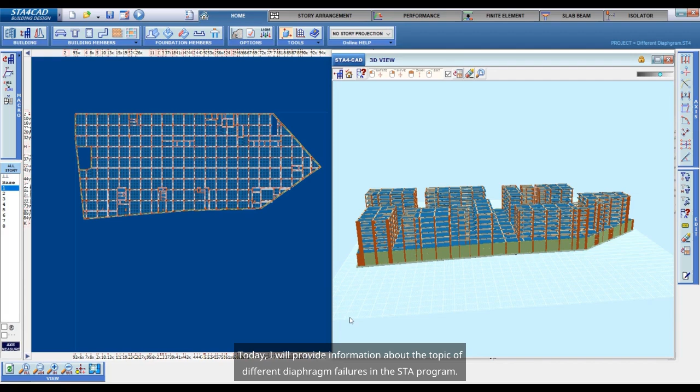Hello everyone. Today I will provide information about the topic of different diaphragm failures in the STA program: how different diaphragms are assigned in the STA program, and in which situations we need to apply different diaphragms.

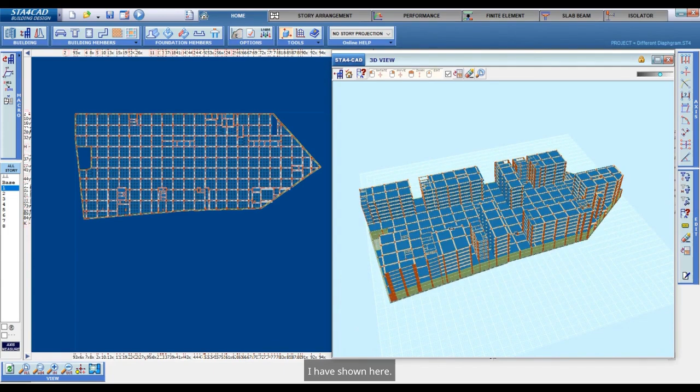The assignment of different diaphragms is definitely a method that must be applied in structures like the one shown here. If we examine how this example differs from normal structures, it is evident that we have a structure where the foundation and basement are rigid.

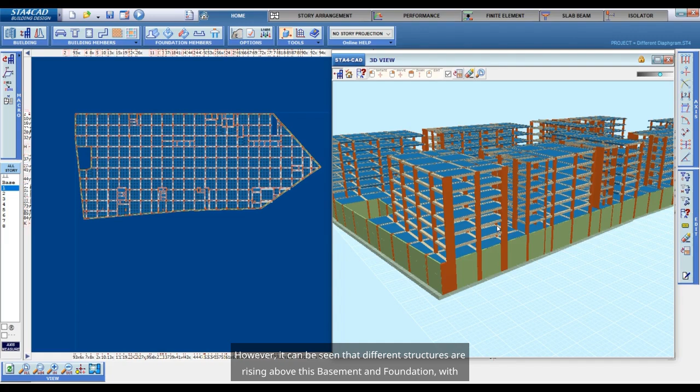The foundation and basement behave like a single structure. However, different structures are rising above this basement with separate blocks being constructed. If we solve these structures within the same data, we must perform different diaphragm assignments for these blocks that rise separately, because if we solve them under a single seismic effect, we will be considering only the highest period.

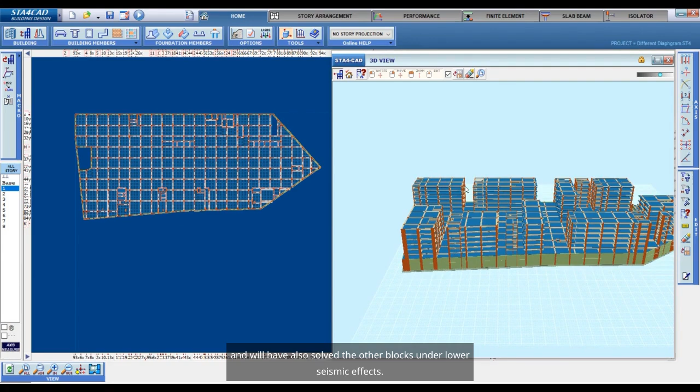We will also have solved the other blocks under lower seismic effects. This will not be a correct approach either, because the rigidity of each block is different from one another. Their heights may also vary for this reason, and they will behave more rigidly. Blocks at a lower height will actually bear more seismic load.

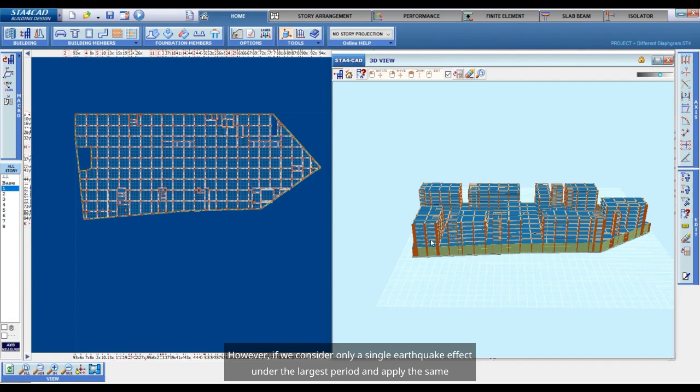However, if we consider only a single earthquake effect under the largest period and apply the same earthquake to the entire structure directly, we will have designed the structure under low seismic loads, and the peak seismic effects we calculated for the whipping effect will also be incorrect. Therefore, when we apply different diaphragm effects, each block will be calculated under its own seismic effects, and we will achieve a much more accurate result.

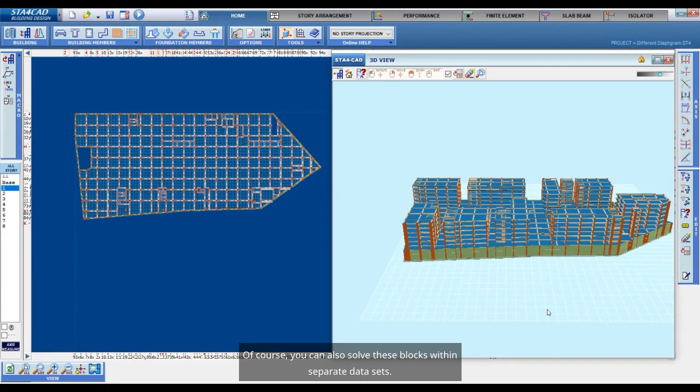Of course, you can also solve these blocks within separate data sets. In that case, there is no need for different diaphragm assignments. When you solve these blocks in separate datasets, each will receive the seismic effects according to its own rigidity, and will provide you with the correct result again.

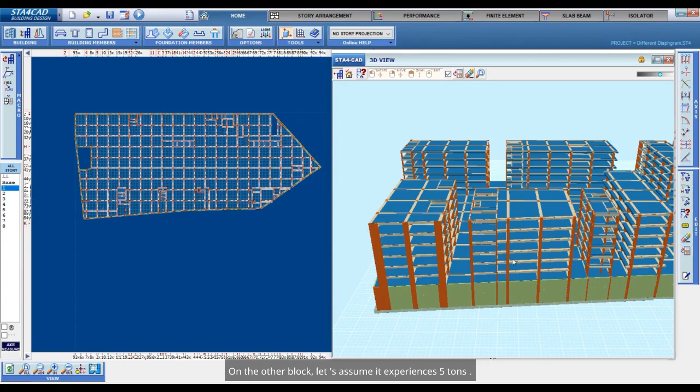For example, let's say this block experiences a seismic effect of 10 tons at the top, and the other block experiences 5 tons. When you solve them separately, you will see the values of 10 tons and 5 tons. However, when you solve them together, you will see the total, which is 15 tons. In other words, there will be no issue, as long as you assign different diaphragms between the calculations.

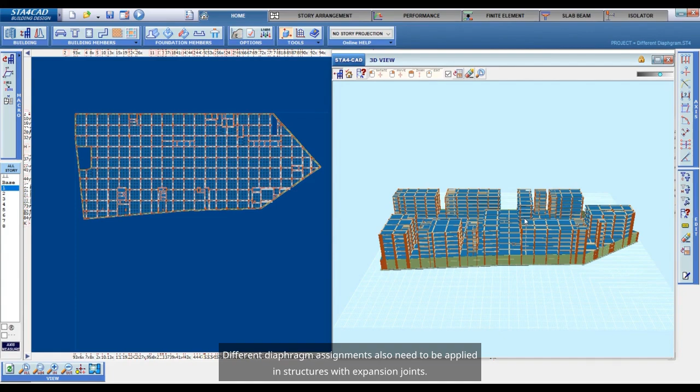Different diaphragm assignments are not only used in these types of structures. They also need to be applied in structures with expansion joints, because in those cases you are separating the related structures with expansion. Now they exhibit different behaviors from each other, so they should also undergo different diaphragm assignments in the same manner.

Here, we mentioned that accurately calculating seismic loads is very important. So why are seismic loads calculated incorrectly when we do not implement different diaphragm assignments? I will also mention this.

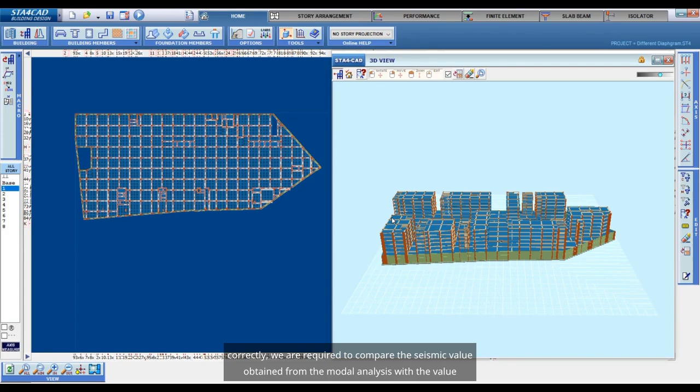In fact, when you perform a modal analysis solution, the seismic loads are calculated correctly even if you do not apply different diaphragm assignments. However, even if the modal analysis is calculated correctly, we are required to compare the seismic value obtained from the modal analysis with the value obtained from the equivalent method multiplied by the beta irregularity factor. We need to consider the larger of the two as the total seismic effect.

If beta is for an irregular structure, 0.9 is used. If it is a regular structure, 0.8 is used. The value is entered from here.

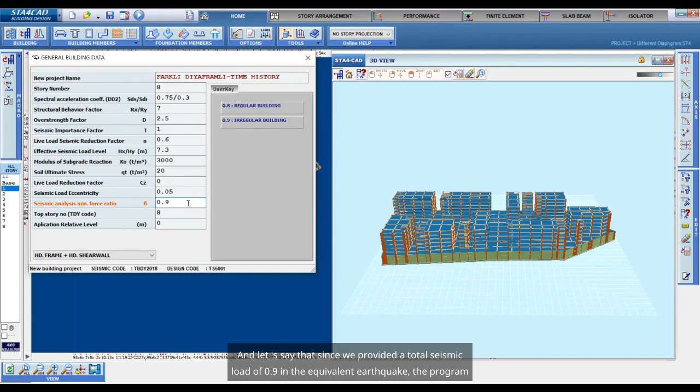Let's say that since we provided a total seismic load factor of 0.9 in the equivalent earthquake, the program will also multiply by 0.9 and compare it with the value obtained from modal analysis. It will take the larger of the two. If the modal analysis value is larger, there will be no problem.

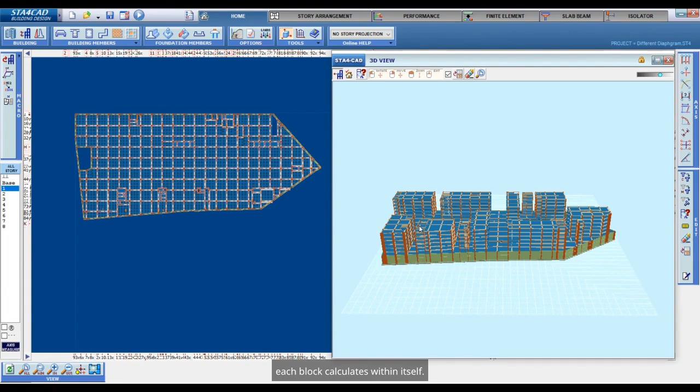However, there is a possibility that the equivalent earthquake value may be significant. In terms of accurately calculating the equivalent earthquake load, we need to perform different diaphragm assignments and ensure that each block calculates within itself. Otherwise, it will go with the highest period condition and solve the entire structure, resulting in an incorrect seismic calculation. The value we obtain from the equivalent method will be incorrect.

If the equivalent value is large, we will have designed our structure with an incorrect seismic force. This is important from this perspective in multi-block structures.

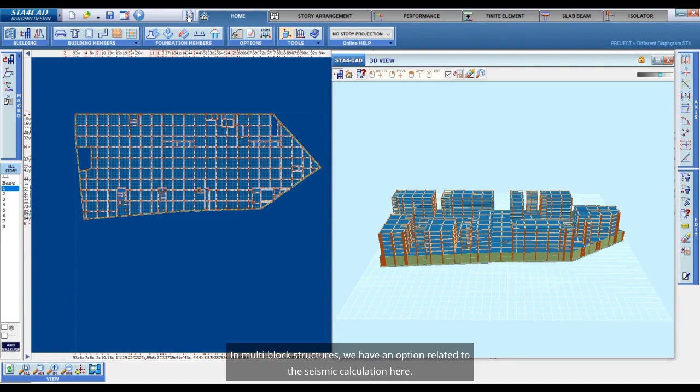We have an option related to the seismic calculation. Here, we need to mark this. Yes, look here, we are coming to the seismic code option, that is, the earthquake options.

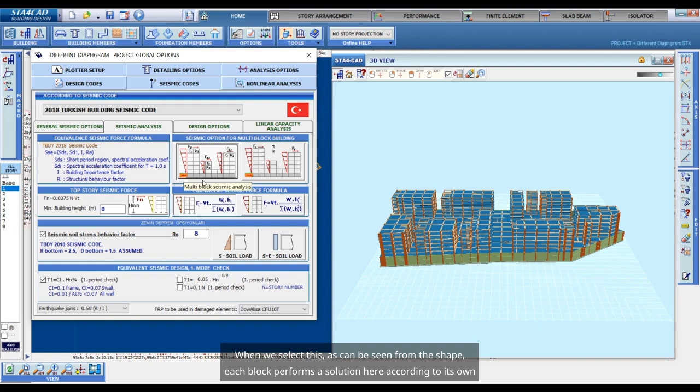Here we have the option for seismic analysis. When we get to this point, yes, we need to select this option. For multi-block structures, it is important for this to be selected. When we select this, as can be seen from the shape, each block performs a solution according to its own period, its own rigidity, and under its own seismic loads.

Here, you can see the option that should be selected for single block structures. It performs the solution based on the structure with the largest relevant period. It is designed as a single block structure, and the seismic load affects it accordingly, distributing the seismic loads to all blocks based on this. As can be seen, each block does not distribute seismic loads within itself if it is a single block structure like this, or if separate blocks connect at the upper floors.

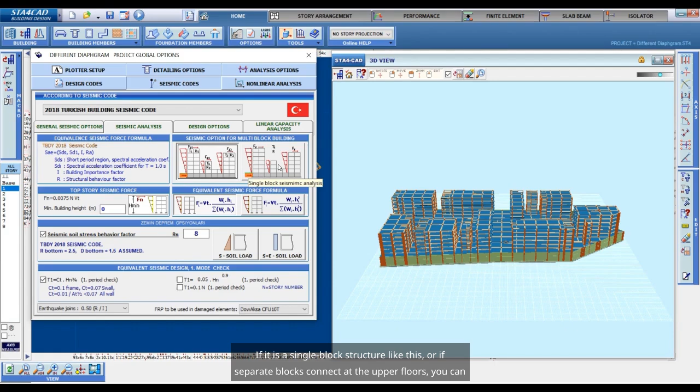You can choose this method. However, the option you need to apply here must be this one. We are selecting this option. After selecting this option, we come here. Now, how will the different diaphragm assignment be done? I will show this here.

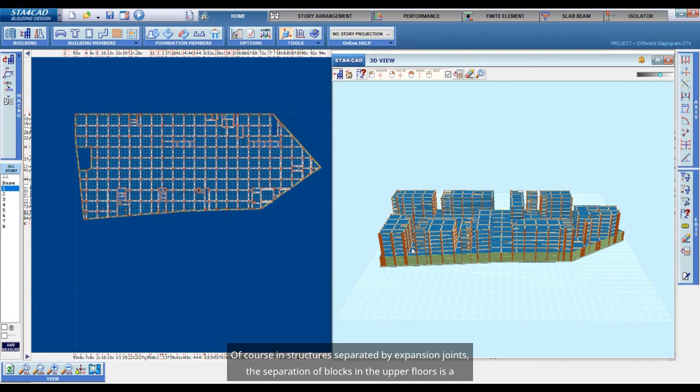Of course, in structures separated by expansion joints, the separation of blocks in the upper floors is a reasonably expected behavior. However, in very rigid structures like basements and foundations, the separation due to expansion joints can cause significant damage to the building. And this practice is not recommended by regulations. For this reason, please be careful not to make any separation with expansion joints in your basement structures.

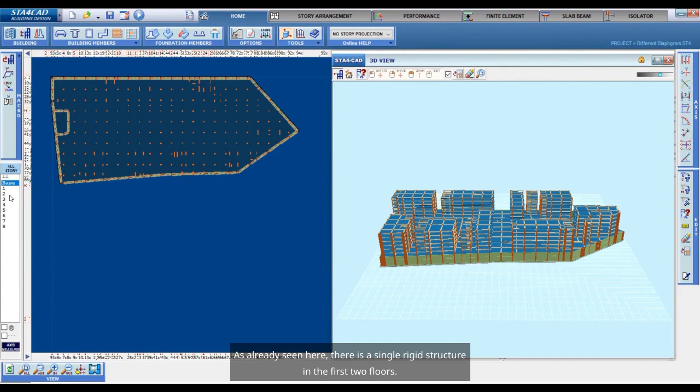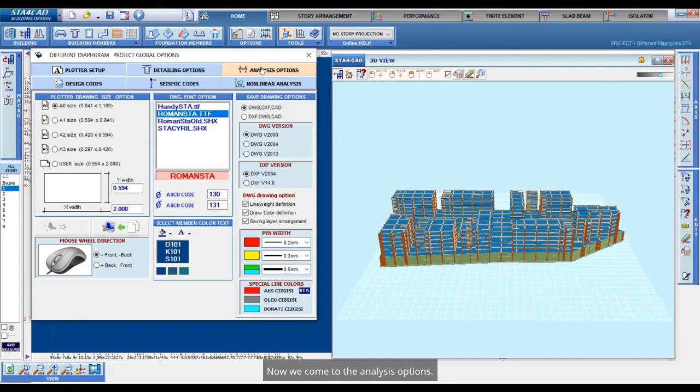Foundation. As already seen here, there is a single rigid structure in the first two floors. Starting from the third floor, different blocks begin to emerge and continue up to the 8th floor. Now we return to the options section for different diaphragm assignments. And here, in the options section, now we come to the analysis options. Initially, we are on page 1 of the static analysis options. The different diaphragm assignment option is here, and we need to select this option.

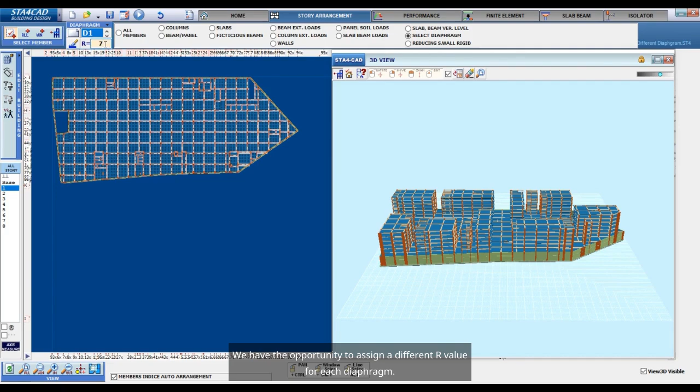After selecting this option, we come to the story arrangement button. Here, immediately, the diaphragm select button appears in front of us. When we click the diaphragm selection button, the first diaphragm appears. We have the opportunity to assign a different R value for each diaphragm. Because we will assign different diaphragms to the blocks, the structure of each block, the behavior of the structure, may be different. Therefore, we can enter this R value separately for each block.

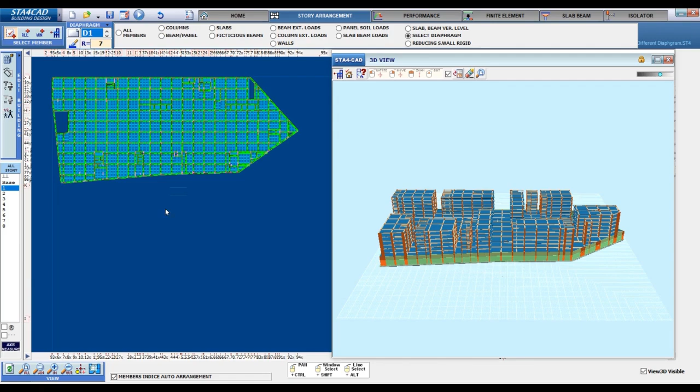Since the first two floors are completely rigid, we can also perform a single diaphragm assignment. There is no issue here. To perform the diaphragm assignment, I select the column with the mouse and include it within the frame. Yes, it has now completely assigned the diaphragm to the first floor. Then I come to the second floor.

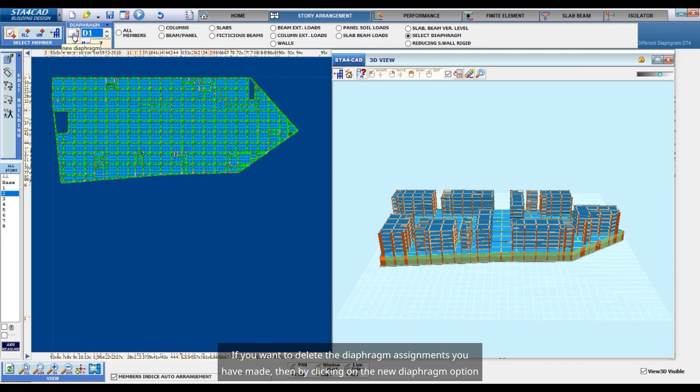Look, there is also an automatic diaphragm assignment option here. I am selecting the automatic diaphragm assignment option. When I click on a floor, that's enough. It will automatically detect it. Look, it has completely assigned the diaphragm for the relevant floor by itself. If you want to delete the diaphragm assignments you have made, then by clicking on the new diaphragm option, all your diaphragm assignments will be deleted and you will have the chance to reassign the diaphragms.

Here we have reached the third floor. From this point on, we need to make a different diaphragm assignment. Of course, we can assign our first block with diaphragm 1 again. The rigid blocks can have the same diaphragm number as mentioned earlier. This is not important. We assigned it this way. However, we need to assign this as D2 now. I'm coming here and selecting this as D2. Afterwards, I select it as D3.

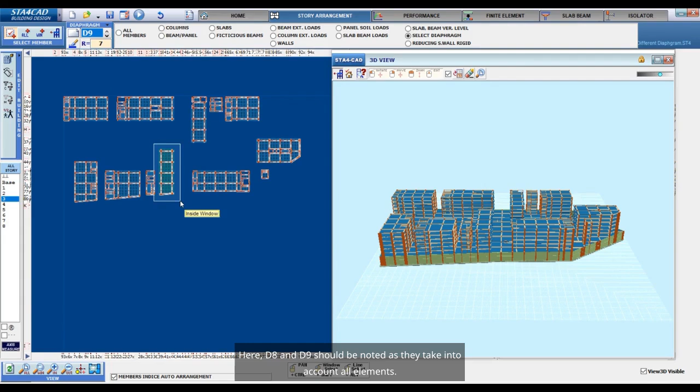Then I assign all the blocks separately in this way. D4, D5, D6. As can be seen, I can enter a separate R value for each of them. There is no issue here. I can enter the appropriate R value for all of them here. D8 and D9 should be noted as they take into account all elements. It is beneficial for us to check.

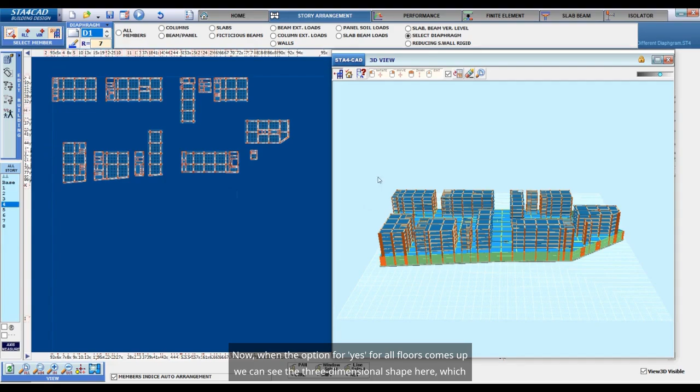Yes, as you can see, I have currently performed diaphragm assignment for 12 of them. However, we have only done this for the third floor, of course. We can apply it to all floors for faster processing. Now, when the option yes for all floors comes up, we can see the three-dimensional shape here, which shows the areas assigned. Now, when I select this area again, you can see that the first one has been completely assigned as 1.

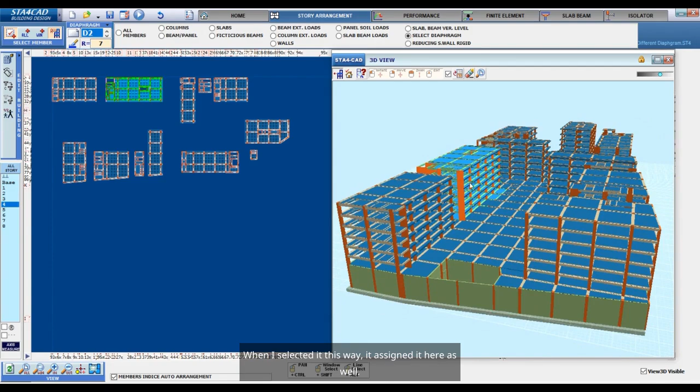Then, I move on to the second section, where the option for all floors is also selected. When I selected it this way, it assigned it here as well. Of course, when we do it this way, it assigns quickly, but different diaphragms started to form again on the first 2 floors. After that, you can assign them to a single diaphragm again, from scratch. This situation occurred because there are completely rigid structures below.

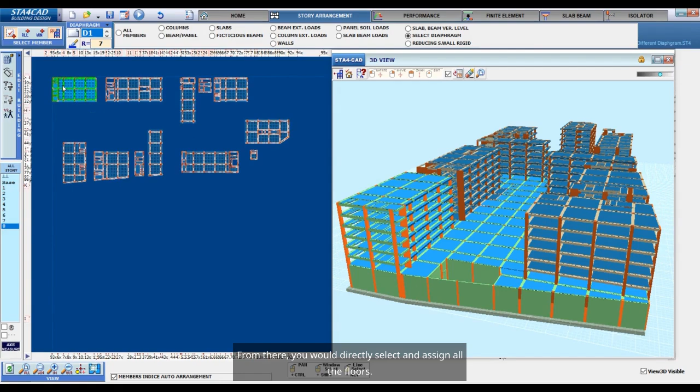In fact, the most logical approach here was to start assigning from the 8th floor. From there, you would directly select and assign all the floors. However, separate diaphragms would still be assigned for the first 2 floors. Then you come back and reassign the diaphragms on the first 2 floors as a single diaphragm again. Of course, you will need to turn off option 10 here.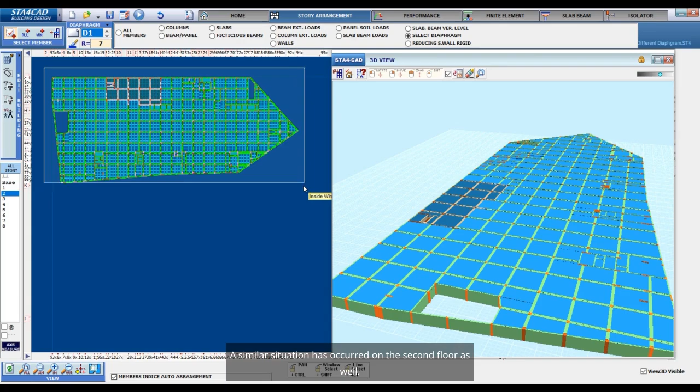It was again taken completely as D1 here. Yes, look. On the 3rd floor and the 4th floor, it has already taken D1 on all floors. When we look at D2, we can see that it has also been taken on all floors. Here. For example, let's look at the 2nd floor. A similar situation has occurred on the 2nd floor as well. Now I'm taking it as D1, like this, yes.

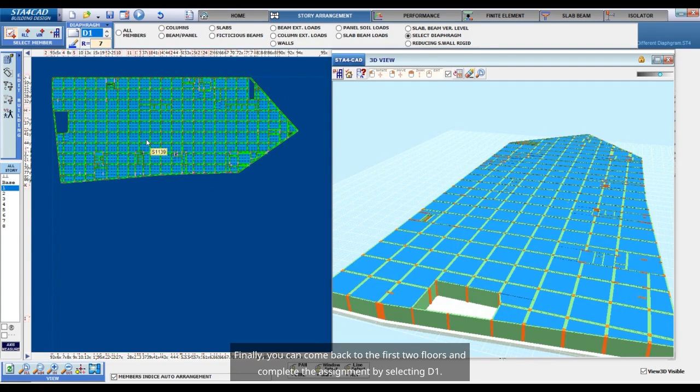However, when we look at the 3rd floor, there is no issue with D1 and D2. Similarly, you will assign all of them, collectively using the option for D3 and D4. Finally, you can come back to the first 2 floors and complete the assignment by selecting D1. Now, I will quickly finish these steps and continue with the video. Yes, our allocation is now complete.

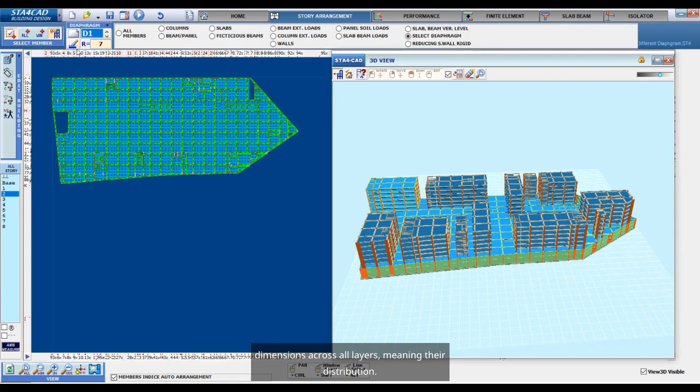After making the allocation, you select the option here again to view the relevant diaphragms in 3 dimensions across all layers, meaning their distribution. For example, the D1 diaphragm. Yes, in this way, we can see that it has taken the entire rigid structure and the first block here. Then we come to D2. Yes, we can see that this is just the 2nd block without touching the rigid part at all.

Then the 3rd block, this way. We can visualize that we have made a correct allocation. Yes, we can visualize all the blocks when we arrive this way. Yes, we have completed the allocations at this point.

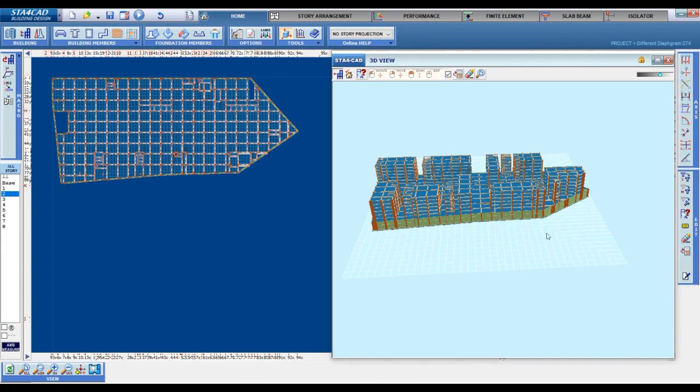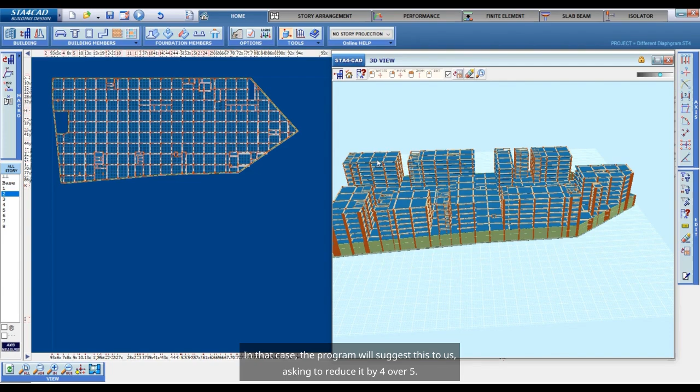After this, when we analyze the structure, there may be different evaluations for the blocks, since calculations will be made separately. As you know, when you do not meet the shear base moment ratios, it asks us to reduce by 4/5. For example, this block may meet the requirements while this block may not. In that case, the program will suggest this to us, asking to reduce it by 4/5. So, you can adjust R for just this block while keeping the others unchanged, taking the other one to 4/5 times. If such a situation arises, it will already present itself in the analysis results.

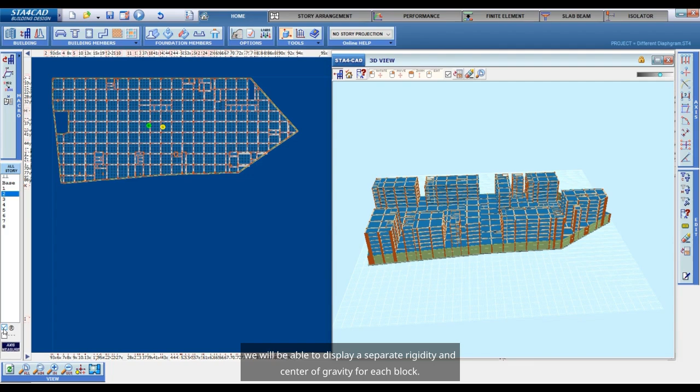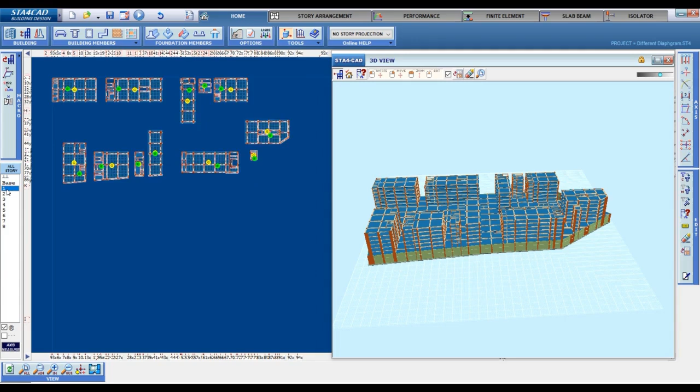In this way, we have made different diaphragm allocations. Of course, now that we have assigned a separate diaphragm to each block, when we open the rigidity centers, we will be able to display a separate rigidity and center of gravity for each block. Here, since there is only a single block, we see only one rigidity and center of gravity. However, as you can see, when we move to the 3rd floor, you can display a separate rigidity and center of gravity for each block. This also shows us that we have made a correct diaphragm allocation for the 4th floor. Yes, in this state, our structure has now had the diaphragm allocation completed. It is ready for analysis.

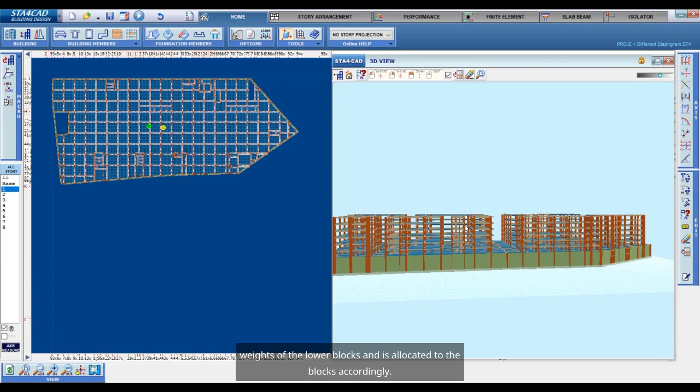There is one more situation I would like to mention here. As seen here, we have 2 common blocks at the bottom. We have two basements. The contribution of the lower blocks to the upper blocks is calculated by distributing it in proportion to the weights of the lower blocks and is allocated to the blocks accordingly. In this way, we have also completed our diaphragm allocation. Now, we can save our structure and perform the analysis.

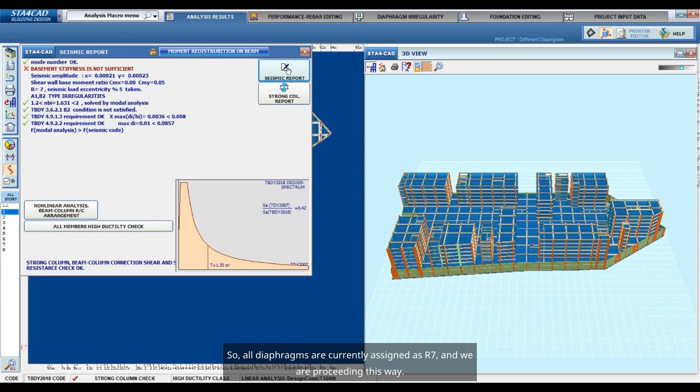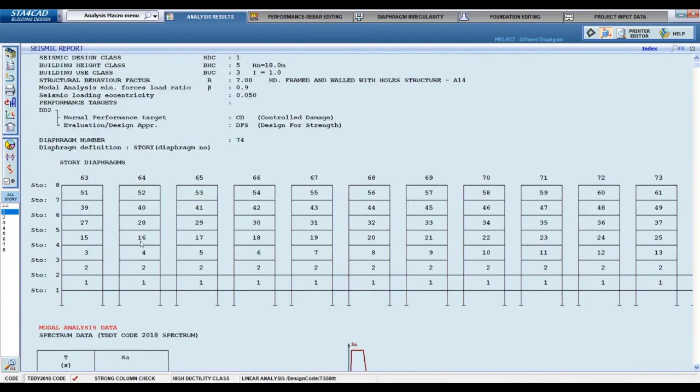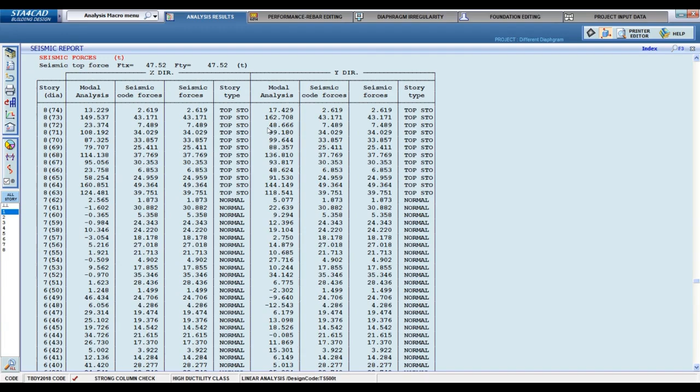Yes, our analysis has concluded; we did not receive any warnings related to any coefficient here. So, all diaphragms are currently assigned as R7, and we are proceeding this way. When we enter the earthquake report section here, yes, here it shows the separated diaphragms. And when we go down a bit, we will now come to the earthquake loads. Let's come from here. Yes, there are earthquake loadings at the level of the floors. When we look at the total values in the end, in earthquake loading, here it shows the blocks individually. At the top, it displays the total loading.

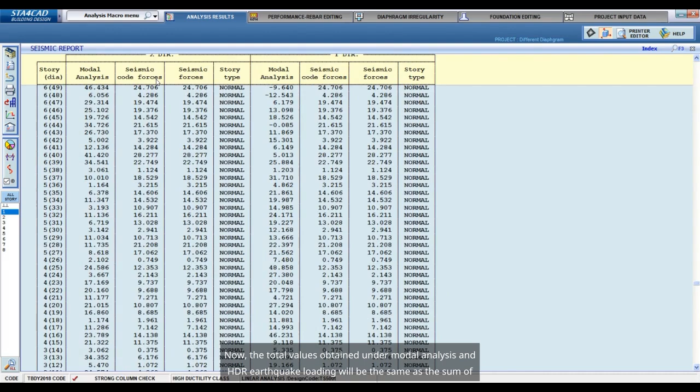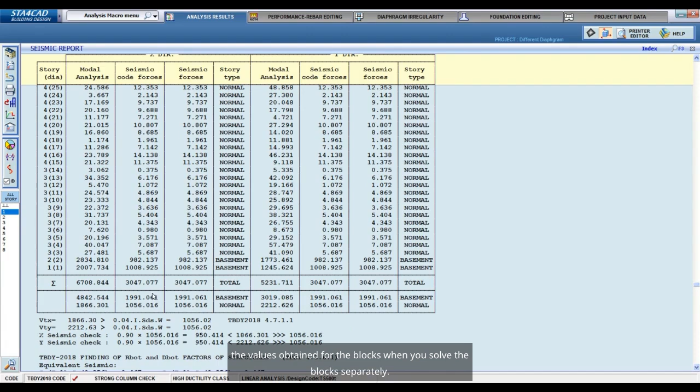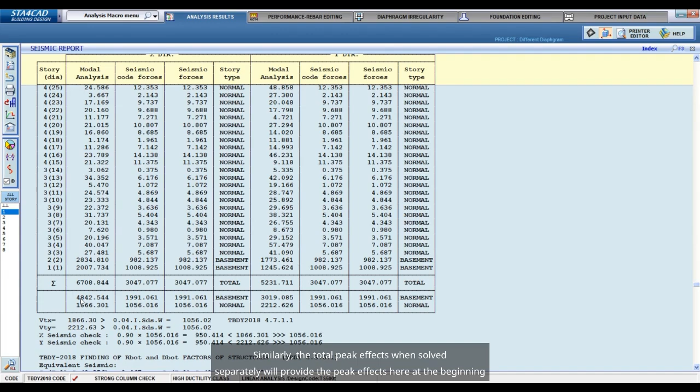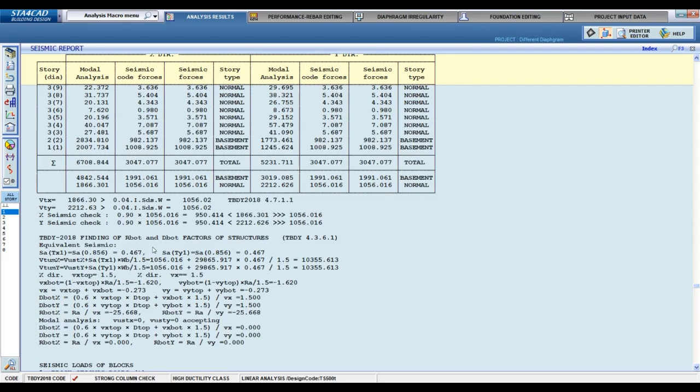Now, the total values obtained under modal analysis and earthquake loading will be the same as the sum of the values obtained for the blocks when you solve the blocks separately. If you solve all the blocks separately, the total earthquake loadings will be the same as the effects here. Similarly, the total peak effects, when solved separately, will provide the peak effects here when the first block and the second block are combined. In other words, it will yield a value of 47.52. If you solve with separate data, you will get these as well.

Here, of course, each block is calculated internally as we mentioned. For this reason, as can be seen here, there are separate calculations for each of them. Yes, these are my thoughts on this topic.